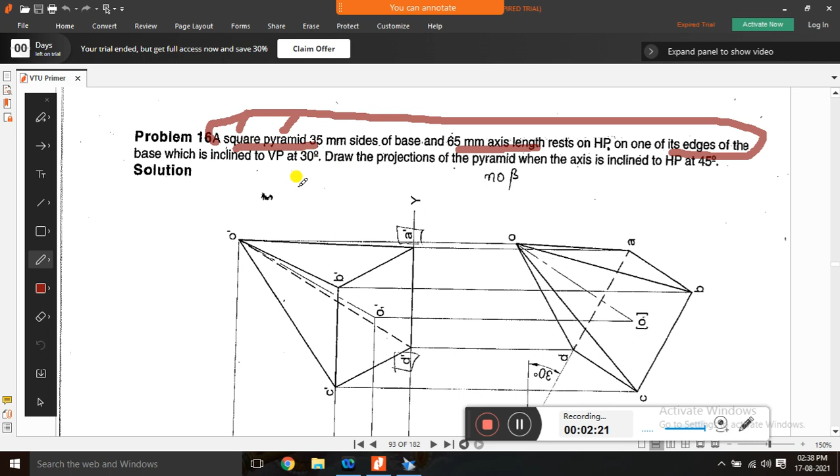The second position is either inclined to VP or HP. Always the second position is inclined to HP, because in solid problems it is always based on HP. So the second inclination is to HP and the third inclination is to VP. Here the second inclination is the axis inclined to HP; the axis is always inclined to HP.

In the third position, it is the edge, the resting edge, that is inclined, so we have to go with the normal method. If the axis is inclined to VP, we go with the locus method. But here the resting edge is inclined to VP at 30 degrees, so we have to go with the normal method. This is the first, second and third position. By using this data, we can easily construct the first, second and third position of this solid.

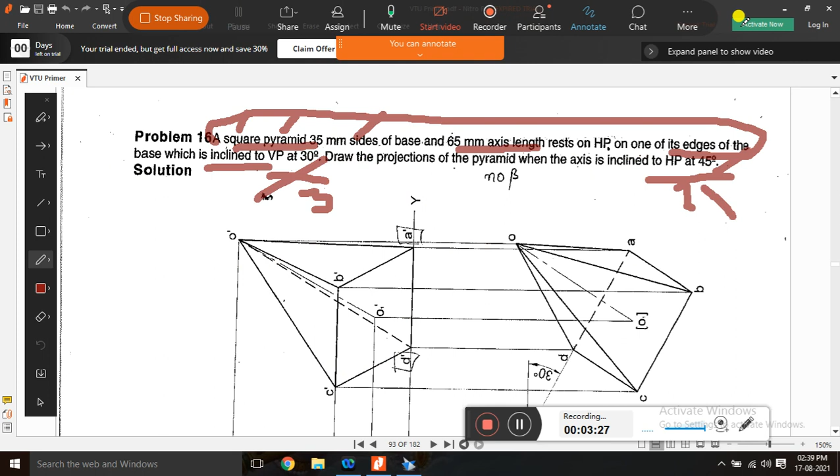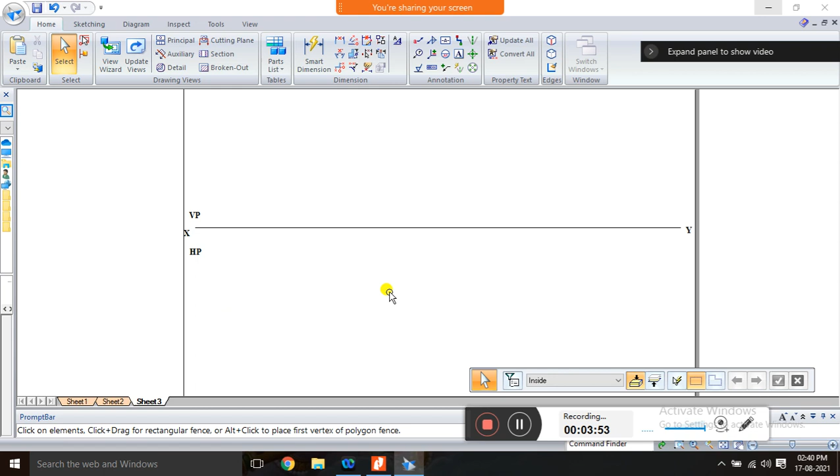First you have to draw the XY line. Second, indicate HP as well as VP. Next, you have to draw a square, the top face. You start with the top face, then go with the front for the first position. For the second position, you go with the front position, then top. For the third, top position and then front. This is the sequence you have to follow.

First you draw the XY line, VP and HP. Next you have to construct a square with the edge condition, as they clearly given it is edge condition. Using sketching, take the line. Here I am going to show the manual way of construction, not with the help of software. I am showing the manual way, how we construct manually.

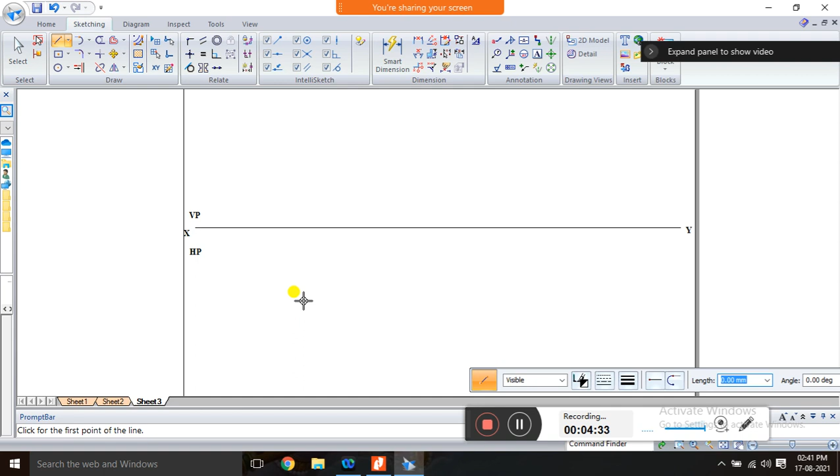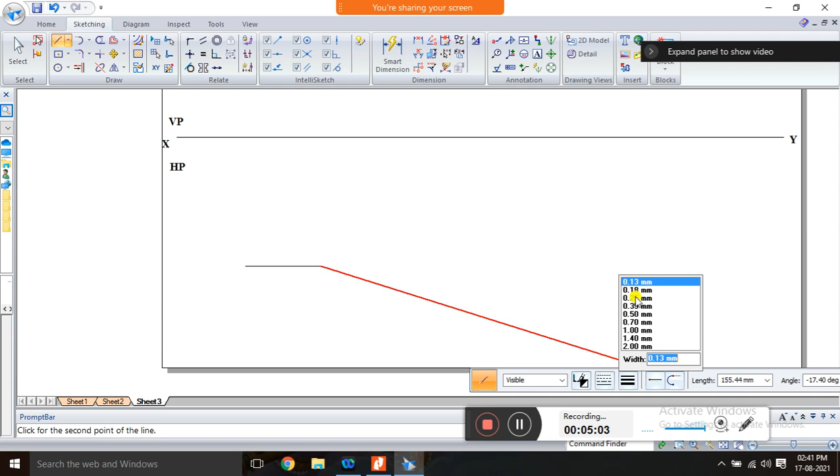This is 35 mm side. First draw a line, place a point, use the scale and mark 35 mm horizontally. The first angle is 0. First use the scale and mark the 35. Next, exactly vertical, again take the same 35.

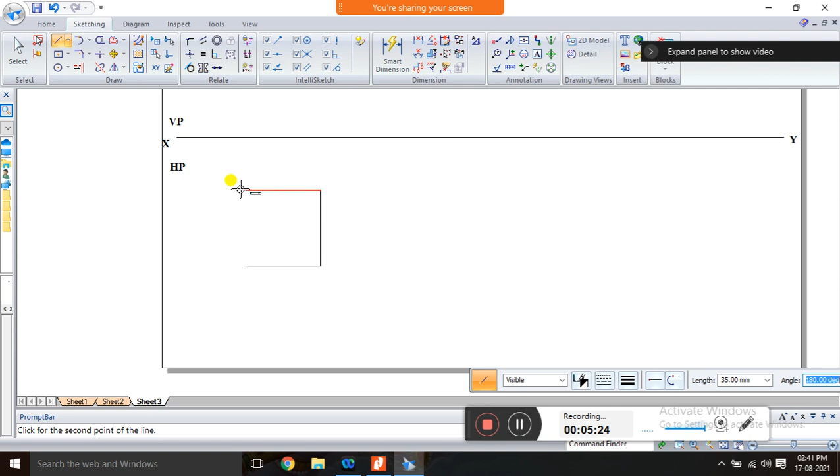Okay, so mark it, then again use the same 35 with the help of your scale, horizontally make 35. Again finally with the help of scale and pencil you have to join. So like this you have to construct. This is a manual way of construction.

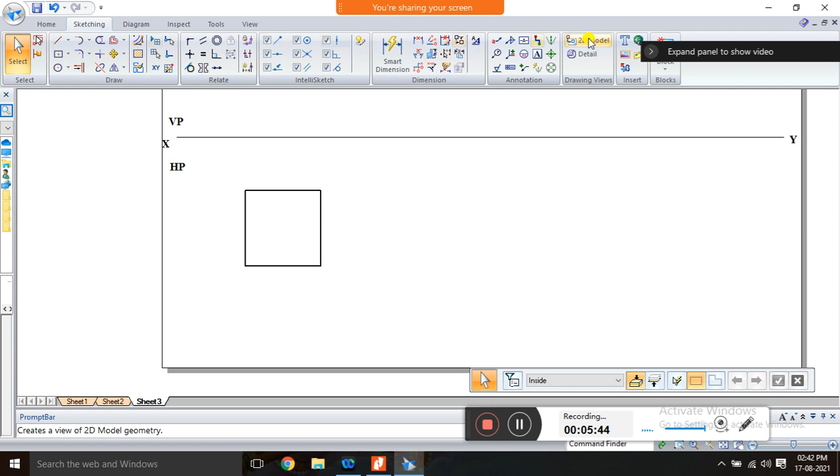Horizontal line and vertical line, and all these lines have 35 mm. With the help of scale you have to construct. Then give the namings: this is A and this one is B, this is C and this one is D.

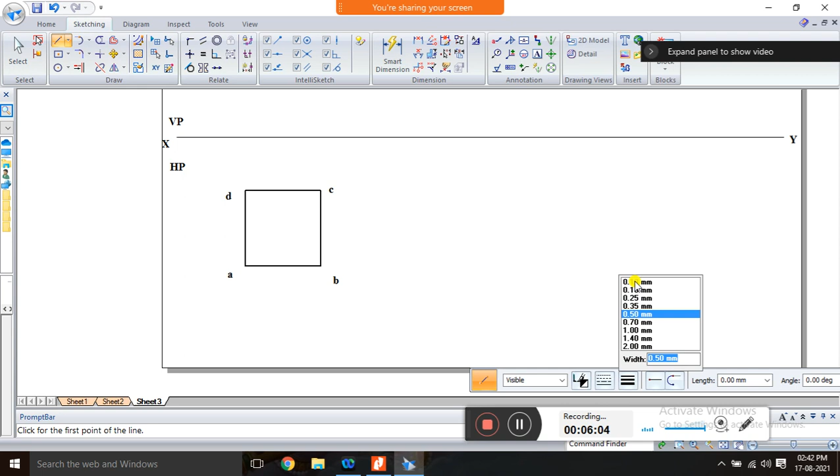Next, take this as a center, and from this center all the corners are joined to that center. So you have to join from here to here and from here to here. This will be the center, and you have to name it that center as O1 in bracket. O is visible at the top, and in the bottom it is O1 in bracket. So like this you have to construct the first position.

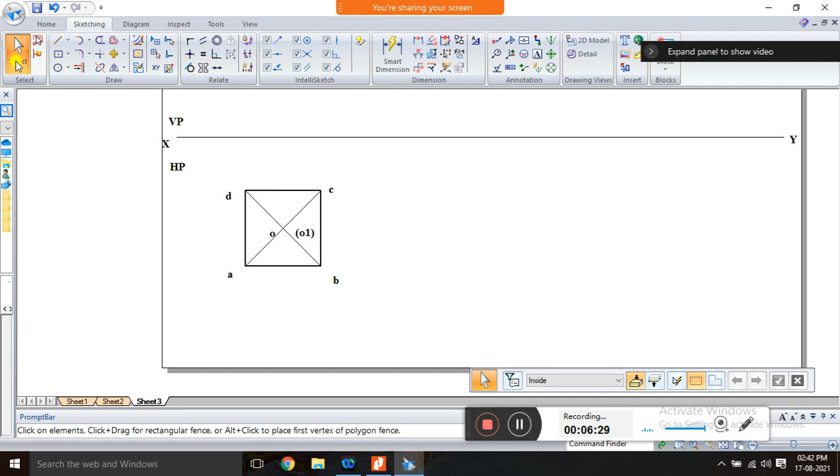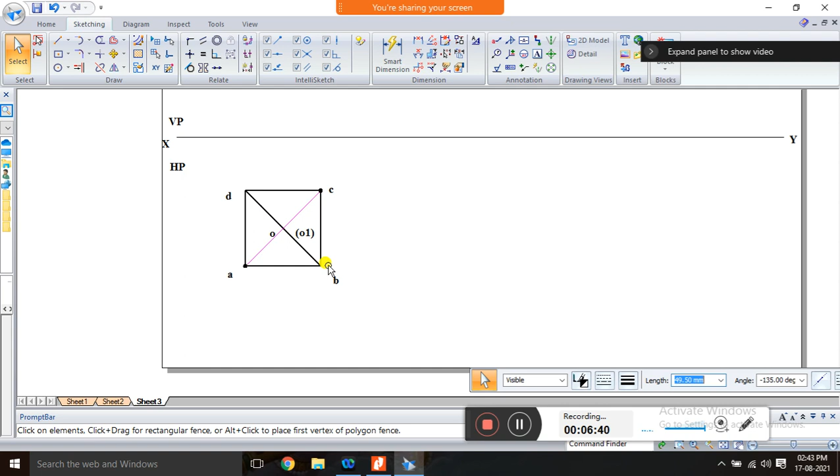One more thing is, these edges are visible edges, that's why you have to increase the thickness. It is a visible edges.

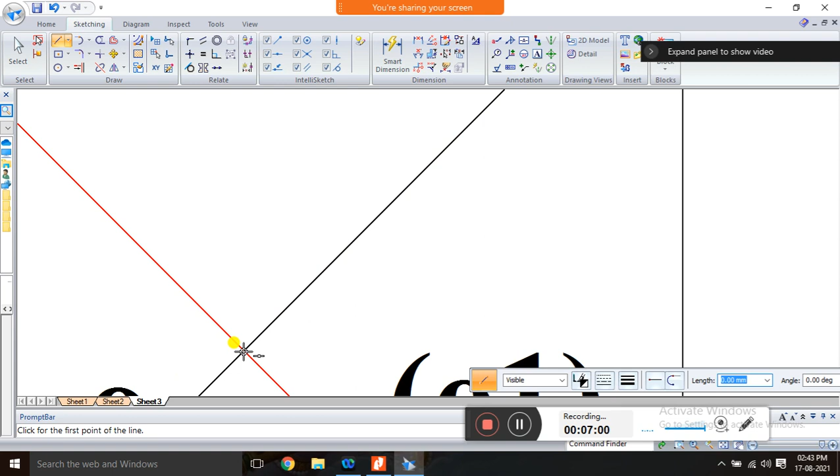Yes, second position, what you have to do is project it, all the edges project up to here. So here exactly you have to take at the center, for the axis purpose.

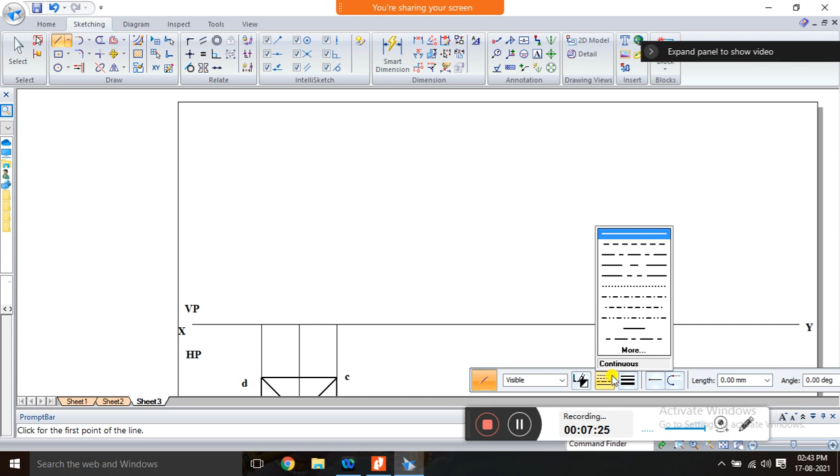Next what you have to construct is the front position of the pyramid. The front position of the pyramid always looks like a triangle. First you have to draw the axis, so you have to select the axis and construct it. That axis is of 65 mm, the axis length is 65 mm. So you have to type the 65 and place it. This is what the axis.

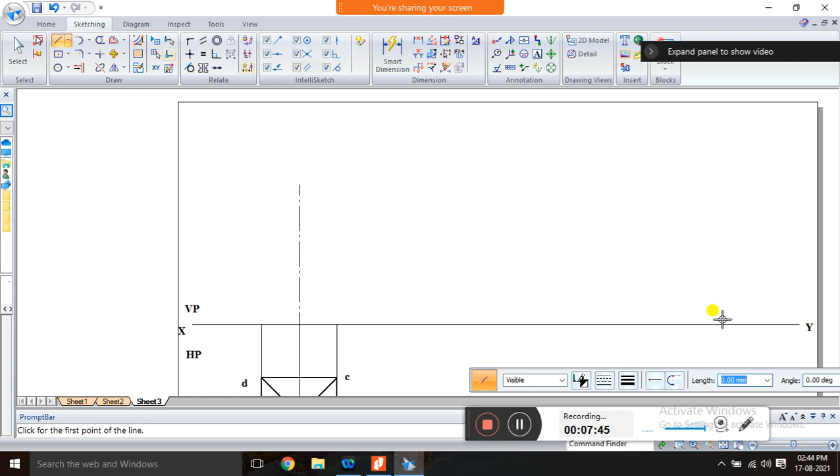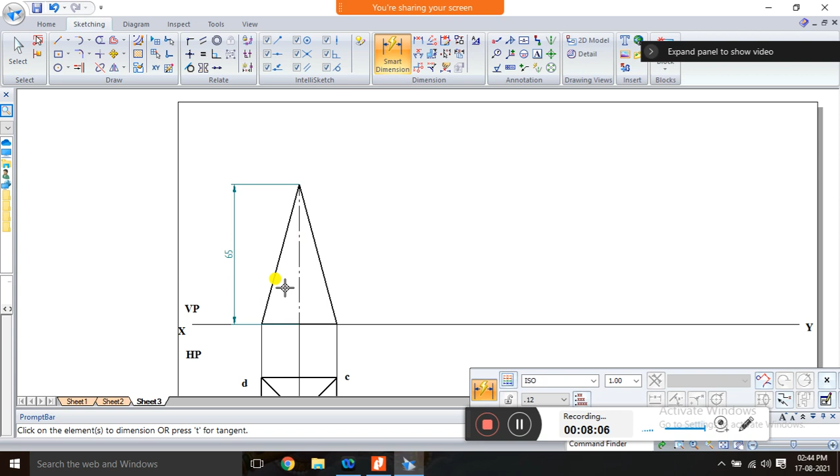Next what you have to do is you have to take the A line, with a thickness, like this you have to join with the help of scale. This height is 65 and this side is 35. So it is drawn according to the given data.

So first you have to construct the axis, then draw the line with the help of scale. Join all these things and all the corners should join to the apex. This point is called apex. So now give the namings.

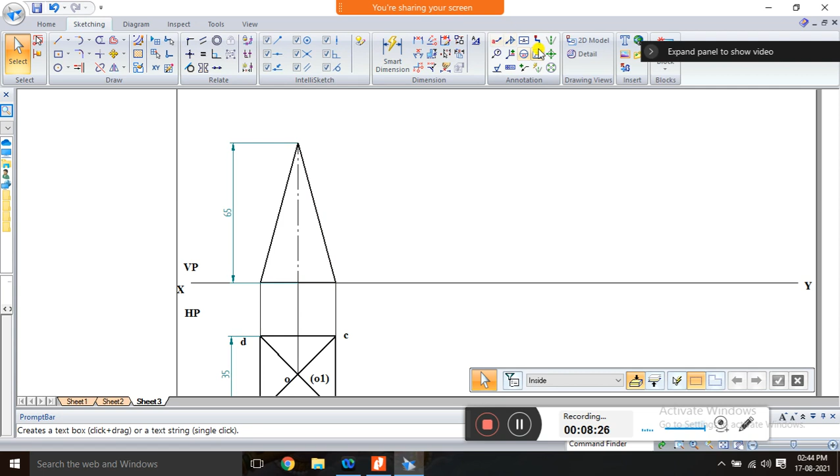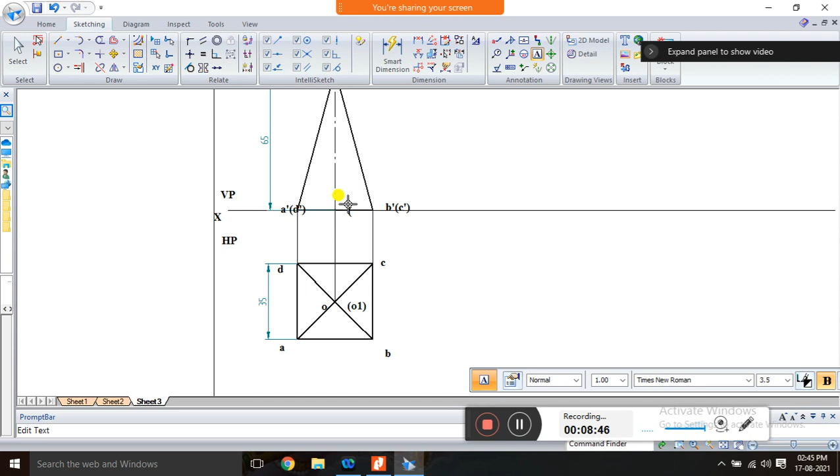And here if you see from the front, A dash is visible, D dash is not visible. Similarly B dash is visible and in bracket it is C dash. And here in bracket O dash 1 is not visible, and here O dash is visible. So like this you have to give all the namings.

So in the prism what happens, bottom also there is a face and top also there is a face, but in the pyramid only the bottom face or base is there, there is no top face. The top face is replaced by an apex, that point is called apex. So this is what the construction of first position.

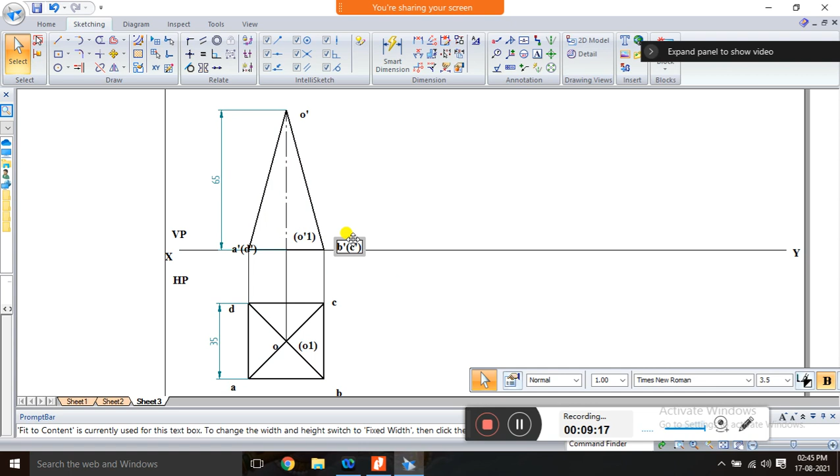Next, second position is HP inclination and third position is VP inclination. So see here the HP inclination, the axis is inclined 45 degree. The axis of the first position, this top front view, is of angle 45 degree. So either you can take base inclination or directly axis inclination.

I already explained in the previous problem, either you can take the base inclination. Base inclination is equal to 90 degree minus axis inclination, that gives the base inclination. It's one method. Second method is directly you can reconstruct or construct the axis inclination. It is also correct, either you can go with the first method or second method. So based on your convenience, you can go.

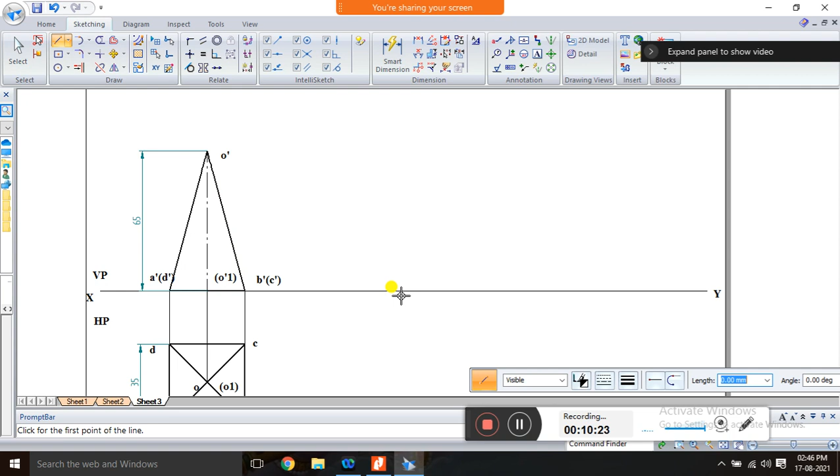So already explained and already shown the two methods also. The first is with the help of this axis inclination I shown, and with the help of this base inclination. So always base inclination is the better one. Base inclination is equal to 90 degree minus axis inclination. Here axis is 45 degree, so the base inclination becomes 90 minus 45, which is 45 degree. Clear? So first I am showing the manual way of construction, not the software.

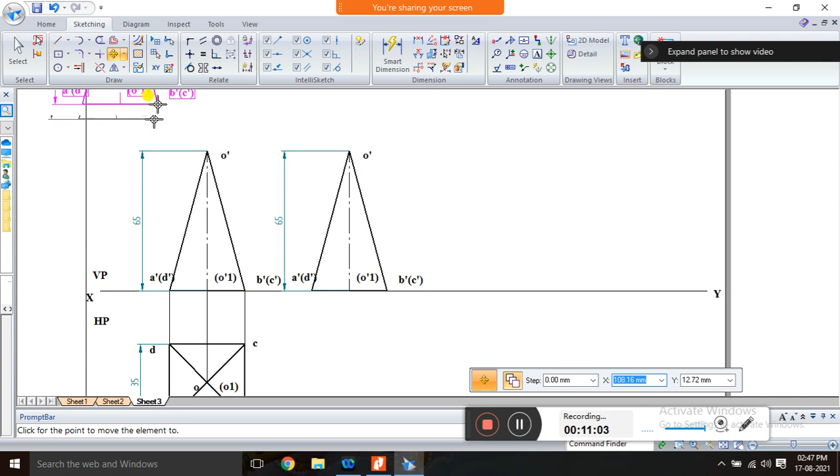In the software what happens, directly you can copy and place here and rotate here. See, I will show you. First you have to select like this and move option, copy this and place it, go to the rotate option, this is the first point of rotation and this is second point of rotation, and this angle is 45 degree. So this is the software. With the help of software I am going to construct, but the manual way is entirely different.

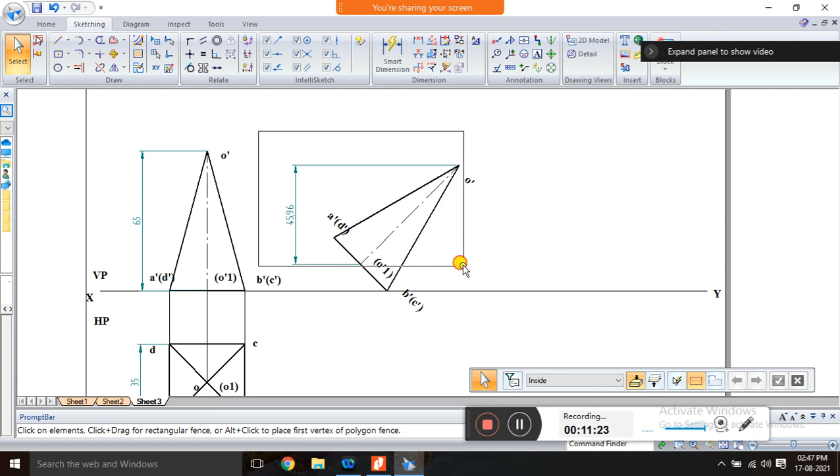See, first you have to measure these distances. Next, take the line and your scale, and use the protractor to mark a 45 degree angle. Mark the 45 degree angle. So this is 45 plus 90.

So like this you have to mark it, and with the length, just mark the line, approximate length. Then use the compass, extend it from B dash to O dash, place it here and cut the arc.

Here that distance is 17.5. Use this to cut the arc. And again, the second radius is 17.5 plus 17.5, meaning you have to place the compass at B dash and stretch up to A dash, place it here and cut the arc. Like this you have to mark.

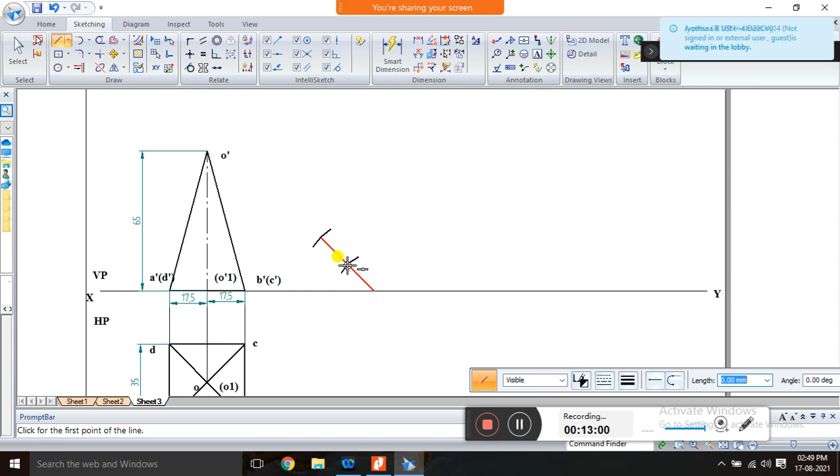Next, use the axis from here, exactly from here, and the length is 65. So exactly 90 degree, from here to here it is 90 degree. Clear? The angle should be 90 degree. Like this you have to place it.

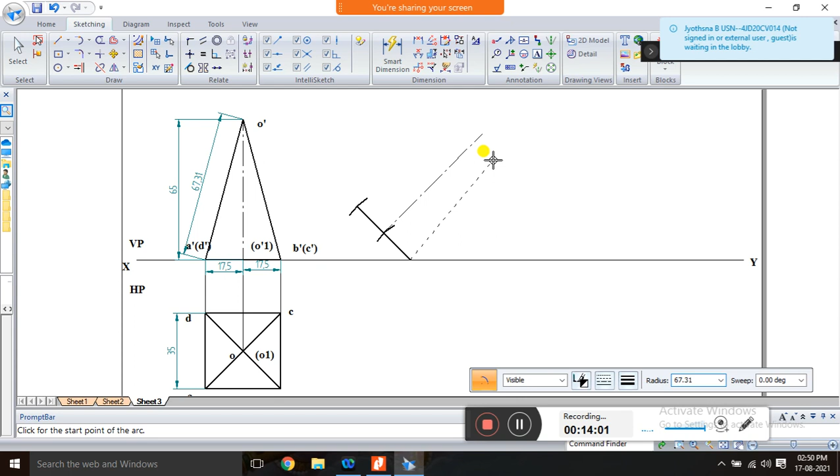If not, you can use one more method. Place the compass at B dash, stretch up to O dash and cut the arc. I will show that method also. Take the compass, place at B dash, stretch up to O dash, and you will get the distance. Place it here, and the distance is nearly 67.31. Cut the arc.

And similarly one more distance, place here, the same distance because it won't change the length, and cut another arc. Both methods will give you the same center point. Either you use the 90 degree method or the arc method, you get the same point.

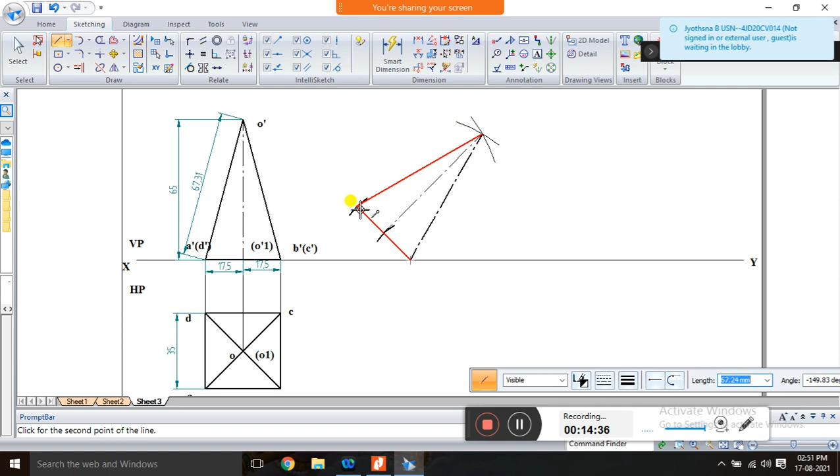Once you get the point, then join that, from here to here and from here to here. So like this you have to join, and you have to give the namings. So here it's A dash D dash, this one is B dash C dash, this one is bracket O dash 1, and this one is O dash.

Like this you have to draw the second position top front view. If you want, you can measure this, it should be 45 degree, and obviously this is also the same 45 degree. You can check, cross verify. This axis and this should be the same 45. Yes, 45 is there now. This is the method.

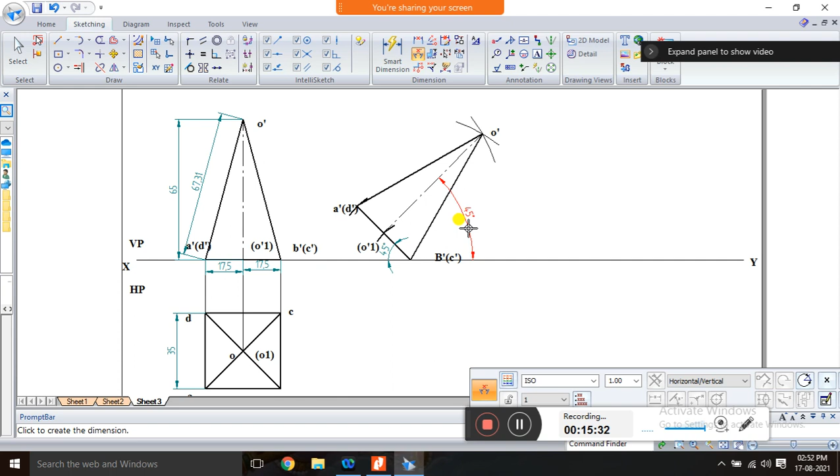Once the front view is over, you can go for the top view, by projecting all the points. First project this point, second project this point, next project this point, and project this center. Yes, first mark the center.

So this is O. Next, this is A here and A here, and this is B. And here D is here. So this is D, and this is C. Like this you have to mark all the points and erase all the extra projections. Once you get the points, you have to name it.

This is O, this is bracket O1, and this point is called A, which is visible, and D is also visible. If you see from the top, AD is only visible, but BC is not visible because it is resting on the HP, and we are inclined. Because of this inclination, this edge B dash C dash is not visible, that's why you have to write it in brackets. B and C is not visible, that's why you write it in the bracket. So now join.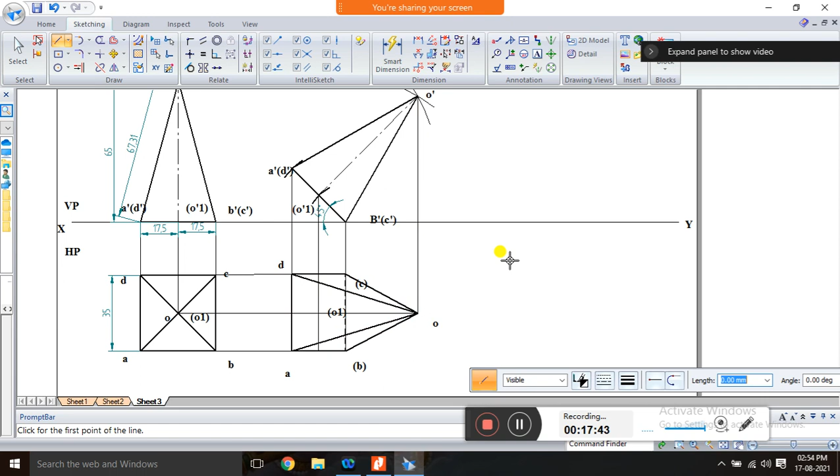So next, this D. It is visible, this edge is visible, and from here also visible. From here to here it is visible, and from here to here is also visible, and these are the opposable edges. So O to D is visible, O to C is visible, O to A is visible. The only edge not visible is BC.

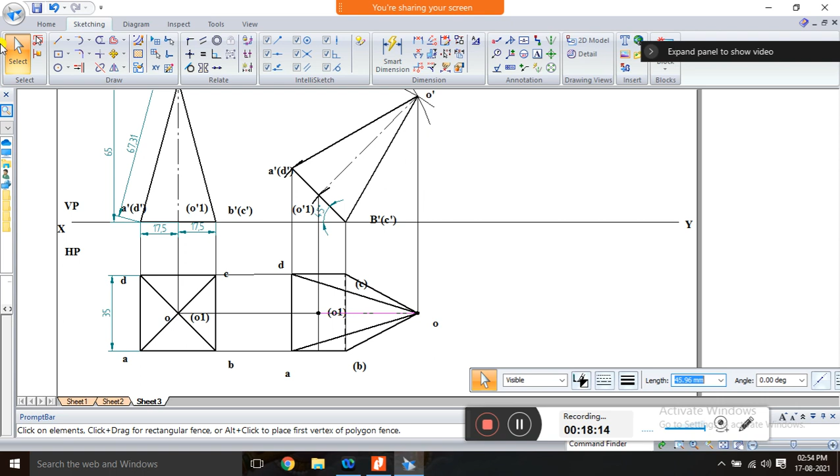BC edge is not visible. And similarly, this axis from here to here, it is an axis. It is also not visible. You have to show it as an axis. It is also not visible. Clear? This is the second position.

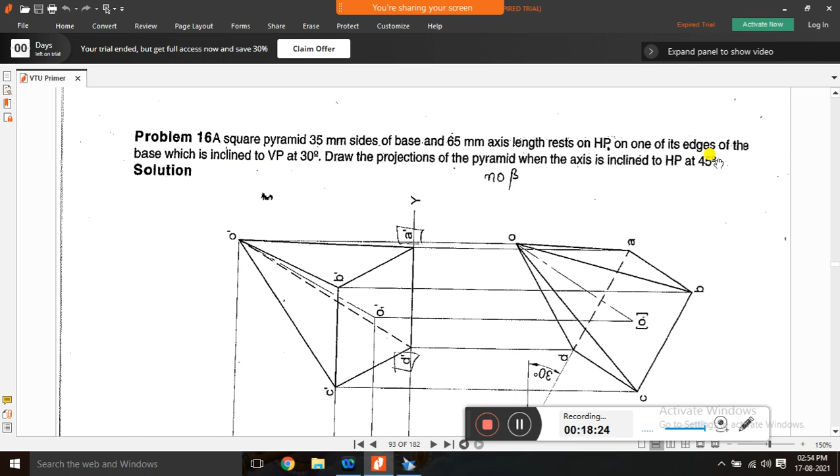The third position is, in the third position, the base which rests is inclined to 30 degree. So this base is inclined to 30 degree. Either you can incline this base like this or like this, you can rotate either way and both are correct. But better you draw 30 degree like this, so that O comes above this dotted line.

So draw a parallel line like this. Next, from here draw a line, and it is of 30 degree. So use your compass, sorry, protractor. From here the angle is minus 30. So use the protractor and draw it.

If you want, you can check, it is 30 degree. So first thing is, you have to reconstruct this entire second position front view on this 30 degree line. So what you have to do is, first I will show you the software method.

Copy this, use the move option, place it like this, and use the rotate option. This is the first point of rotation, the second point of rotation, and place it exactly here. This is the software way of reconstruction. It is very easy, just with the help of move and rotate option we constructed it.

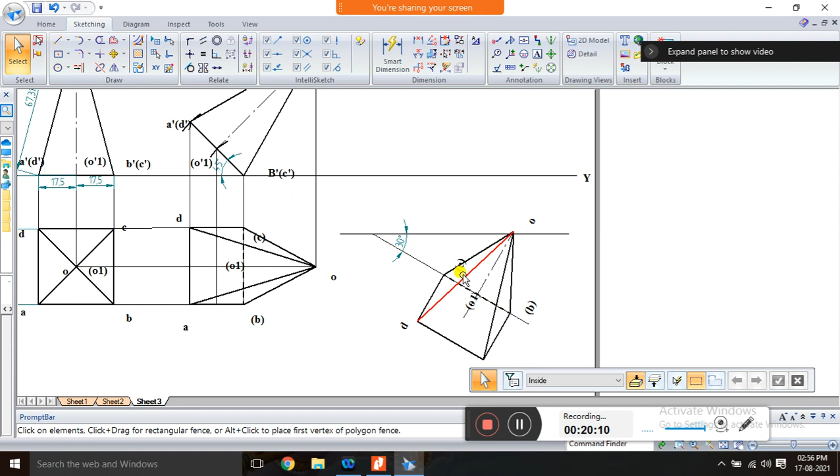But the manual method is entirely different. First, this 35, this line. Use the line, and this line is a dotted line. First draw that, anywhere, it is of 35 mm. Use the scale and draw it.

Fine, and name it. This is what we call bracket C. It is not visible actually, and it's bracket B. So we got the two points, bracket C and bracket B. So next what we need is D, and we also need A as well as O.

For that, either you can go with the box method, which we already discussed in the prism box method, or else directly use the compass to reconstruct. Whichever is convenient you can follow, but better you just go with the box method.

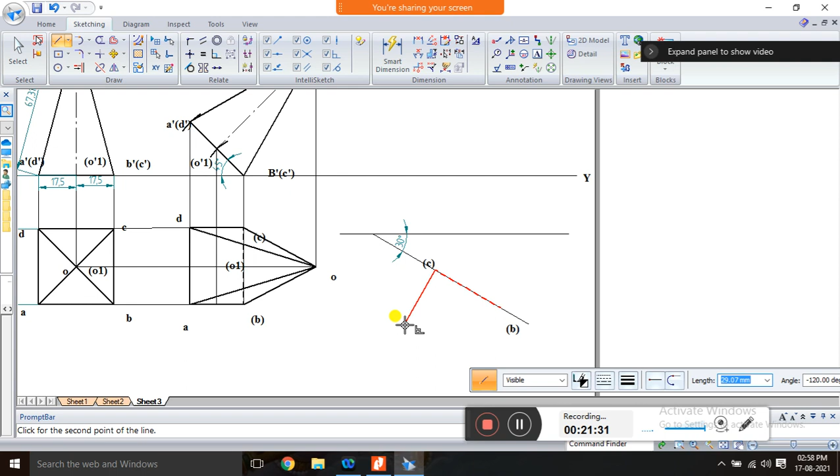We already have B and C, and perpendicular to this you have to draw the line with a distance of this. Take the line from here exactly perpendicular. See, this is perpendicular, exactly perpendicular, you draw that line. And similarly here also, exactly perpendicular, you have to draw the line, and take the compass.

Take the compass and place it on C, stretch up to D and cut the arc. It is of 24.75, so like this you have to cut the arc. Similarly 24.75, so again one more, you cut the arc. So like this you have to cut the arc.

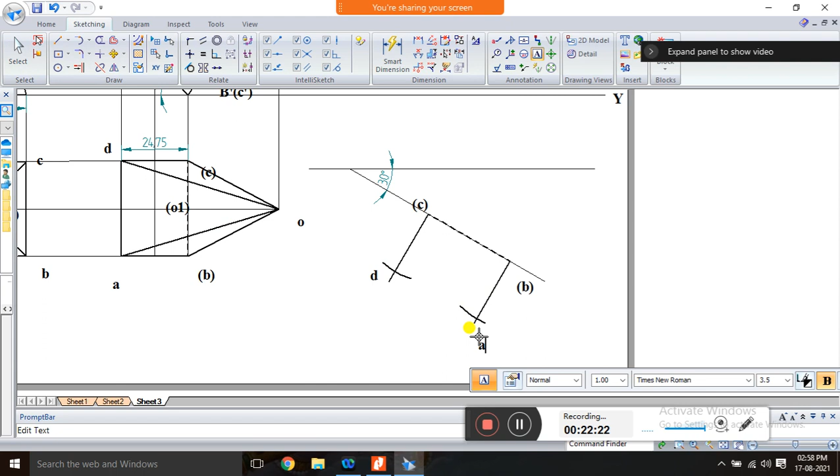You will get the line, join that, and you can name it. This is D and this is A. So now join it, but before that just erase this extra. So now with the help of the line, join it with the help of your scale.

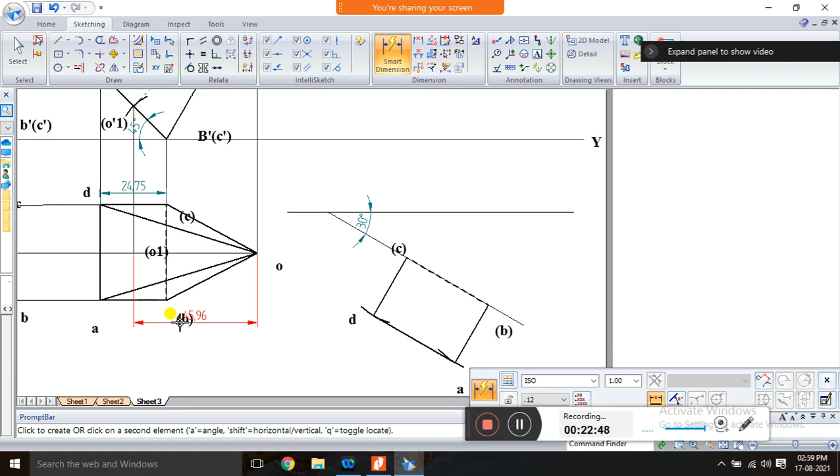Clear? So next thing is, from here to here the distance. From O the distance is 45, so use the same line, and exactly the middle of this, and it should be perpendicular. Draw the line, and we don't know the length also.

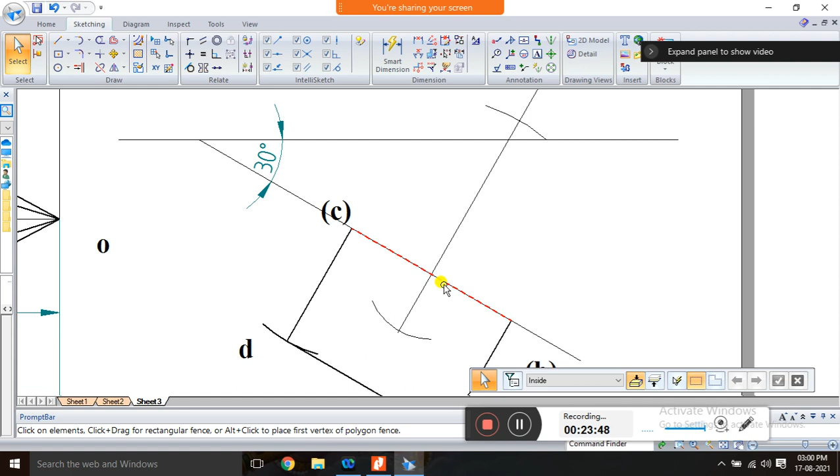So from here to here we know the distance, and from here to here we know the distance. So take the same arc and place it here, and cut the arc. This distance is from here, it is 12.37, cut one more arc. So like this you have to cut the arc and remove the extra projections.

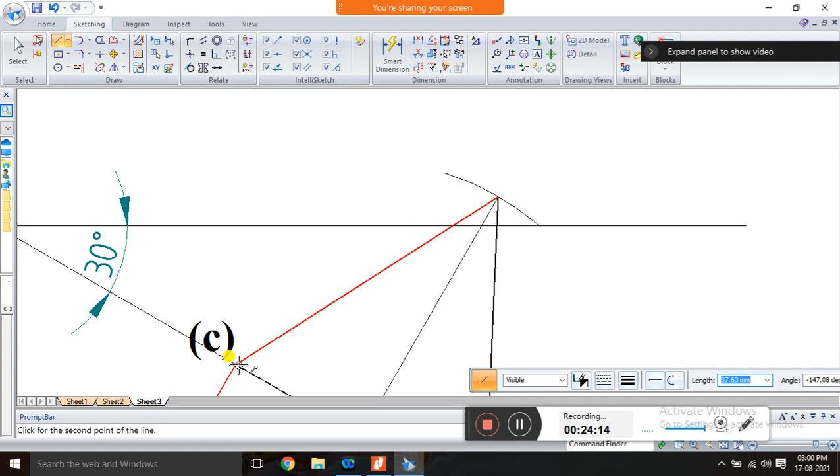Then join all the edges. So here it's a visible one, the same thing. From here to here, from here to here. And this will be the axis. And you can name this as bracket O1, and this one is O. See,

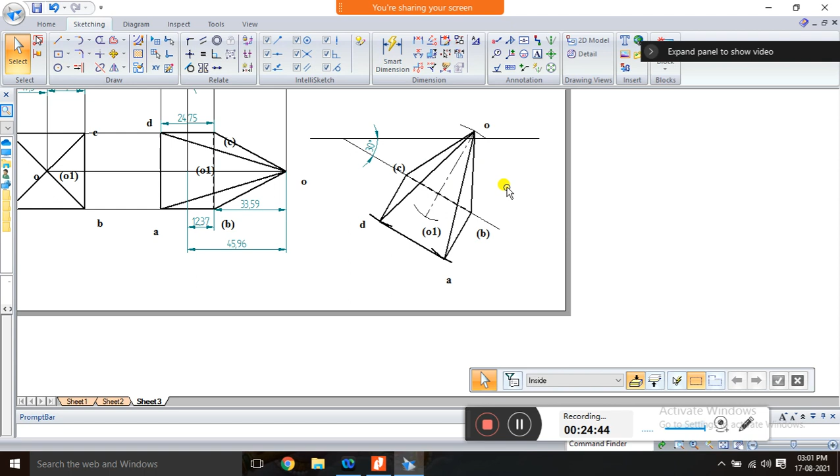I reconstructed the second position top view for the third position top view. Clear? That is with the help of box method. And the next thing is directly project all the projections for the final front view. So like this, you have to project all the points.

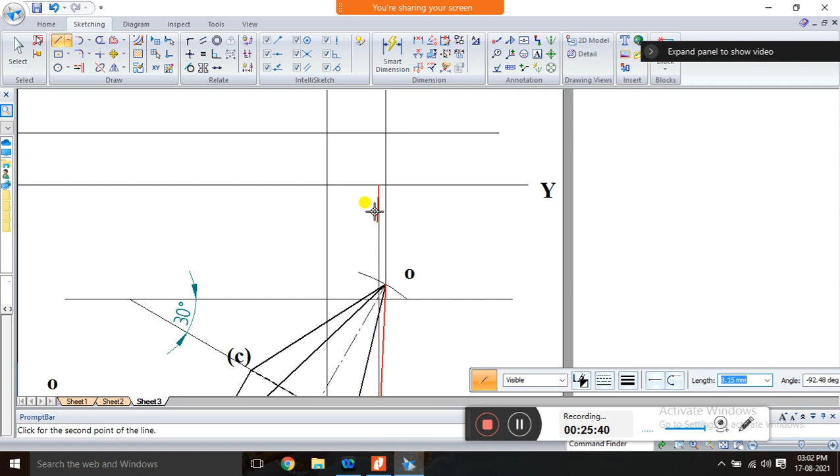First, you have to project the first point, O. So O is here and O dash is here, the first point. Second point, A is here, and A is here. Second point, B is here and B. Okay, then C is here, then C. Then D is here, then D.

With the help of your scale, you just project all the points. After the projection, you just name it this as A dash, and this as D dash, and this as C dash, and this as B dash. So like this, you have to name all the points so that you won't get any confusion.

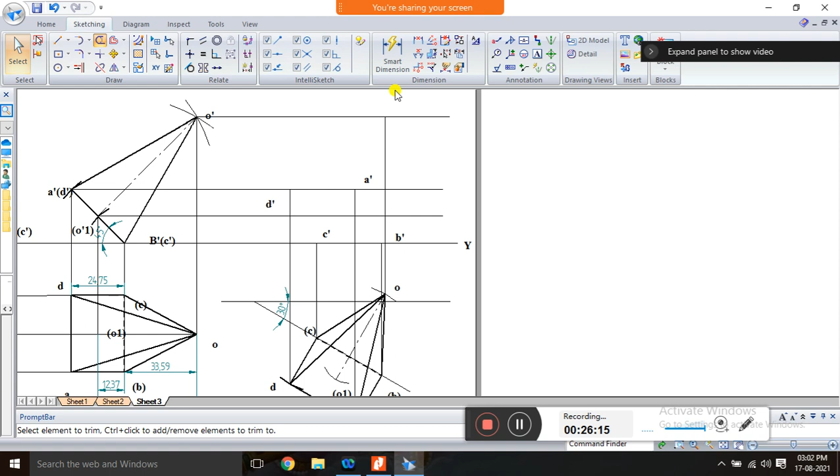Then remove the extra projections. See, if you see from the front, we need a front view, third position. If you see from the front, this top view, it's a top view. If you see from the front, this bottom face is visible. So bottom face is visible. First, you have to draw the bottom face.

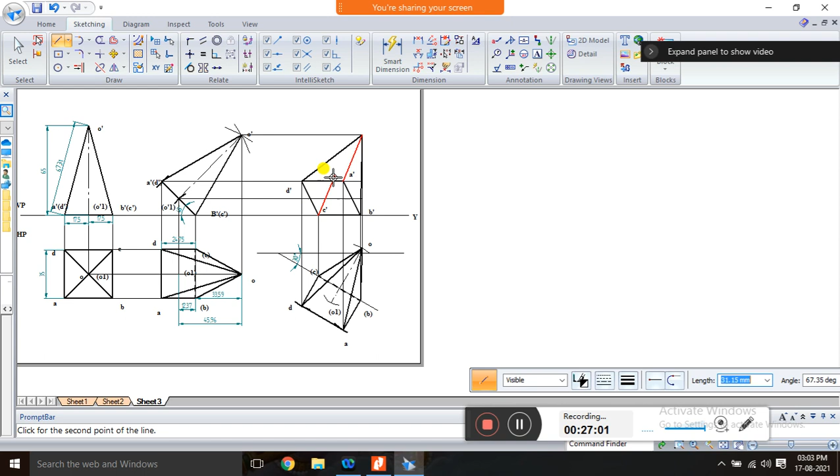So from A to B, B to C, C to D, D to A. This is visible. Next, from D dash to O is visible, O to A dash visible, and O to B is visible. The only thing not visible is C dash to O.

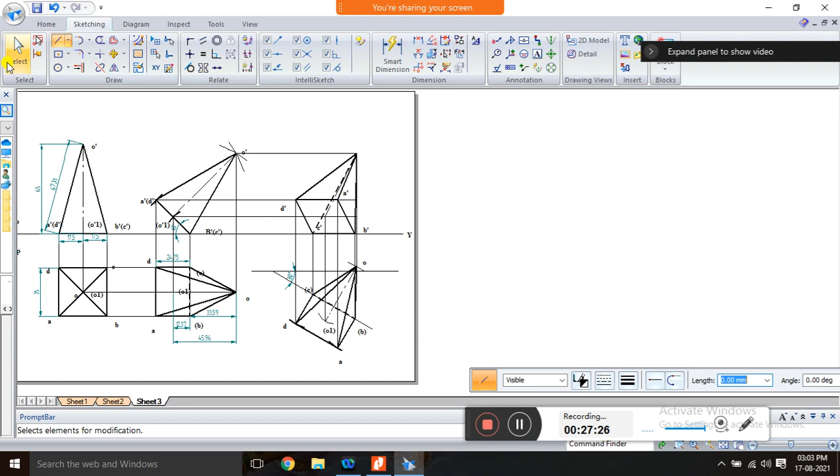And also you have to show the center. That is, you have to draw the line from here to here, and from here to here it is axis. Yes, like this you have to show the axis.

And in this, O dash 1 is also visible, and O dash is also visible. Clear? So this is a final view.

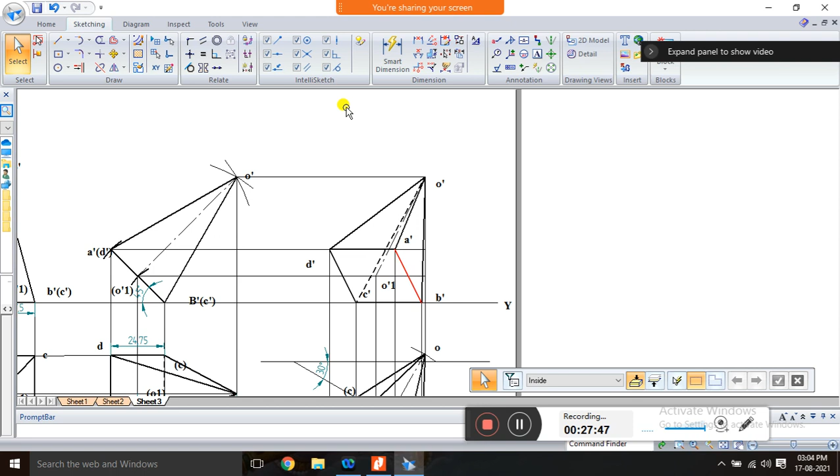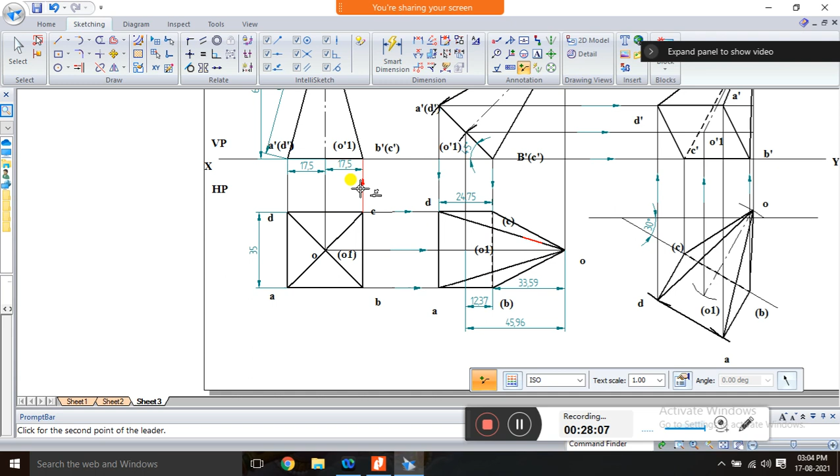And after completion of this, you have to show the arrow mark from where to where you have to project. Like this, you have to show the arrow mark. Here it is downward, and here it is right side. Always the projection should be right side. Clear? Yes, this is a final view.

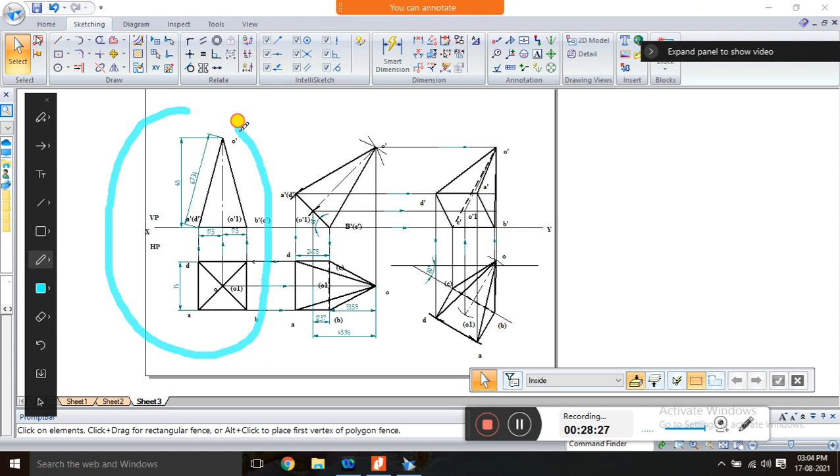If you do correct all the three positions, you will get full marks out of full marks. So this is the first position, the true position. Here we can able to see the square with the edge condition and pyramid. Clear? First position condition satisfied.

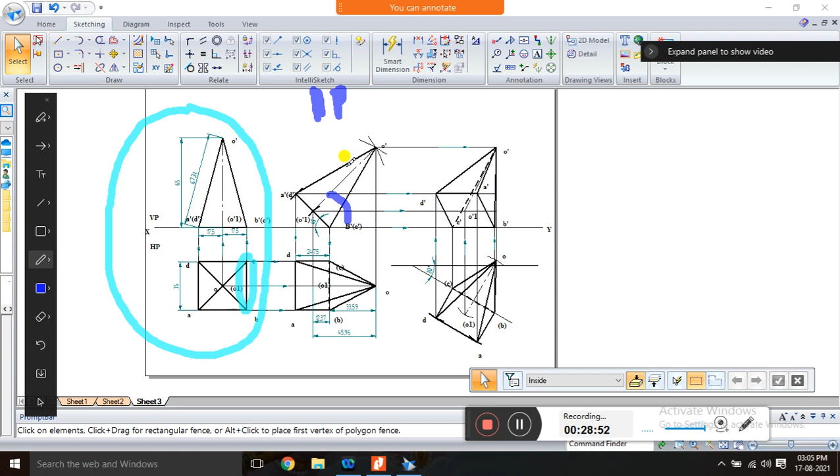Second condition is the HP inclination. HP inclination is 45 degree. This axis is 45 degree, or the base is 45. Base means it's 90 degree minus axis inclination. We got the angle. So here HP inclination is second position. So if you see from the top, this face is not visible, that's why we drew this dotted line.

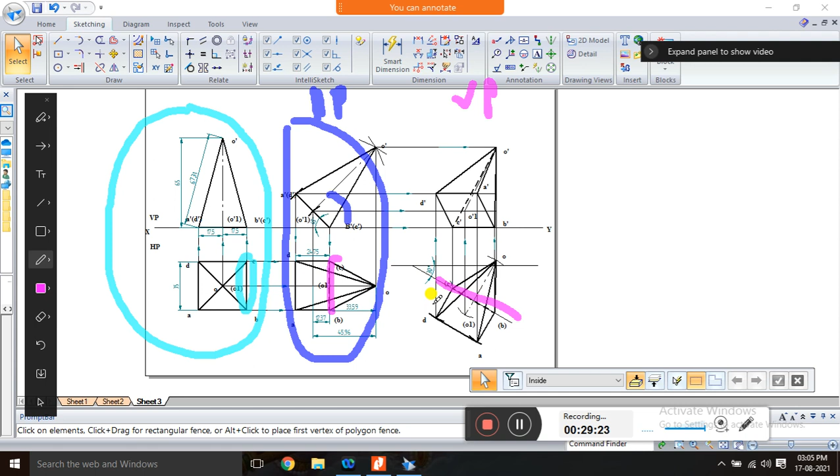And the third position is VP inclination. Here the VP inclination is 30 degree, and the edge is resting, the edge is inclined to VP at 30 degree. First draw the 30 degree line and reconstruct the entire thing with the help of box method or with help of your compass, and reconstruct the top view, and finally project upward, and finally project to the right side. You will get a final front view.

So in the final front view, the bottom face is visible. You can see this bottom face is completely visible, and these two faces are visible, but the back face, the dotted line, is not visible. Clear? It's an edge condition, a square pyramid with normal method.